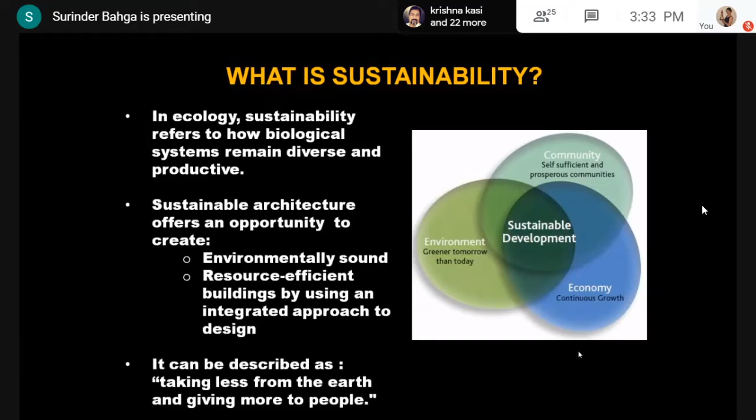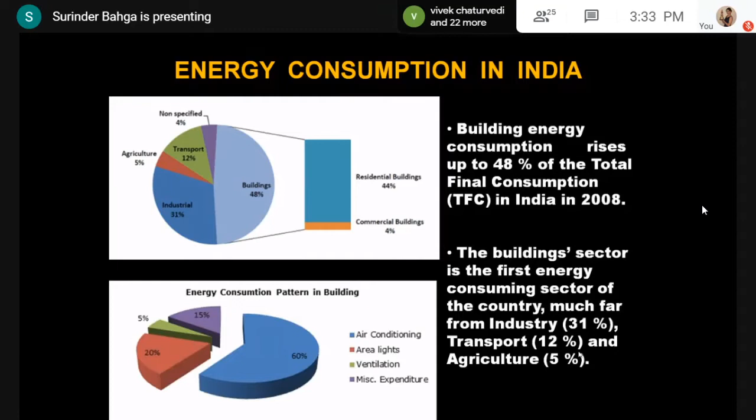So to have a quick look, giving you some historical examples. This is the picture of remains of Mohenjo-daro, which existed in 2600 BC. You can see in this picture our forefathers have given a lot of respect to the local topography, to the wind direction, to the local climate, and to the local materials.

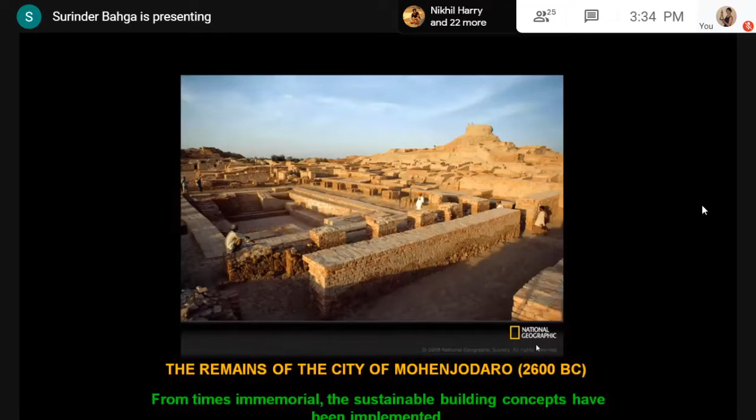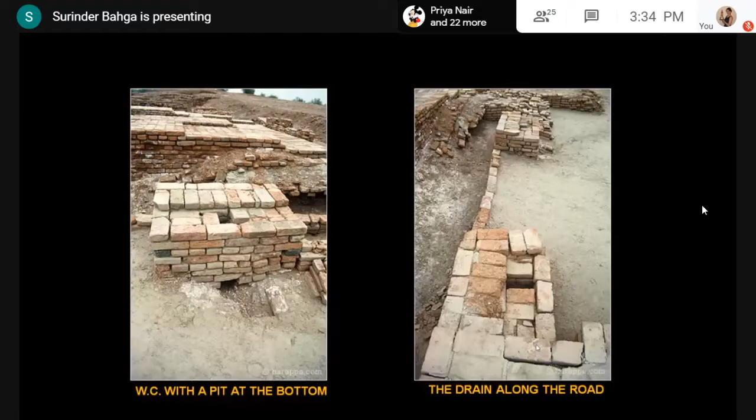There was a proper drainage system. The houses were planned - very modern houses were planned, which have no decoration.

And likewise, in Rajasthan, in the Rajput period, in 1200 AD, you find these Havelis. You look at the intricate detailing of the facade, how the windows are shielded from the dusty winds, and we have courtyard planning, self-shading pathways, all in these Havelis.

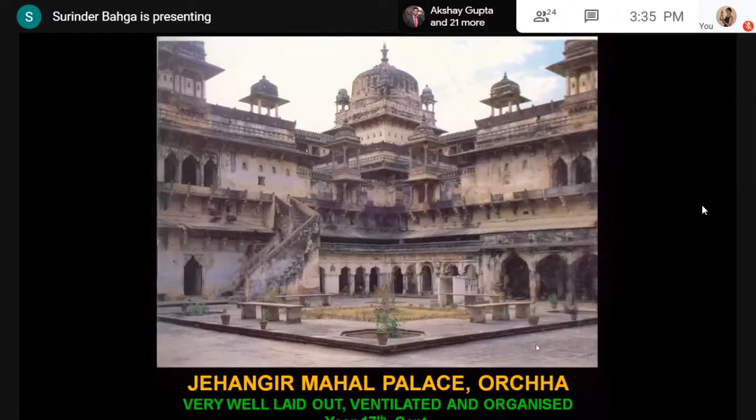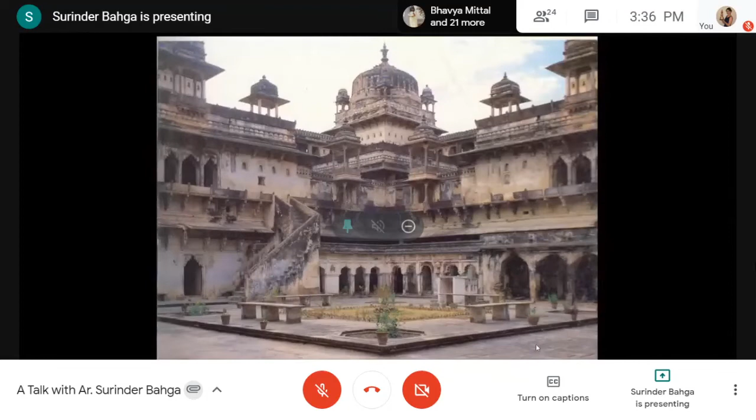This was all done by our ancestors to make the buildings comfortable, but not damaging the environment and Mother Earth. During the British Raj, when Lutyens and Herbert Baker came to Delhi, they studied Delhi's climate, and accordingly they started designing the Secretariat of Delhi, the Parliament House, and many churches and Saint Stephen's School in New Delhi. They took full care of the environment.

In the 50s, when Corbusier was called by Pandit Nehru, the first thing on reaching Chandigarh was he asked his team to study the climate of Chandigarh, and accordingly the city was to be planned.

On our left side is a picture of the Open Hand Monument, which is about 80 feet tall, and it gives the wind direction. This is the emblem of Chandigarh also. This was installed, planned to create awareness in residents about the wind direction, and this was in a way a message for the architects and residents of Chandigarh that we need to respect the climate.

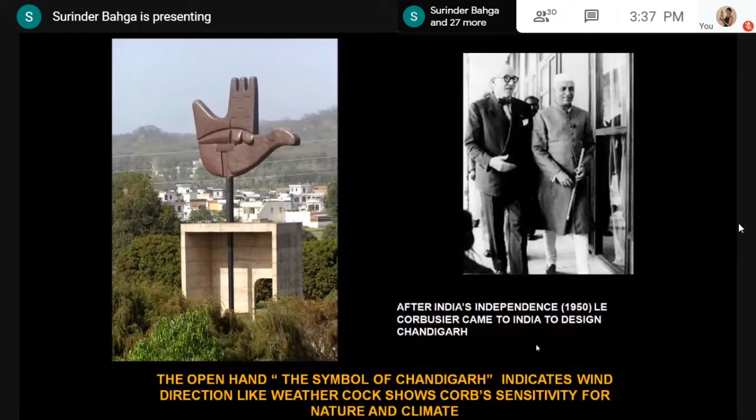Chandigarh is the only city where 35% of the areas are green, and we are proud to say that we have 1700 parks in the city.

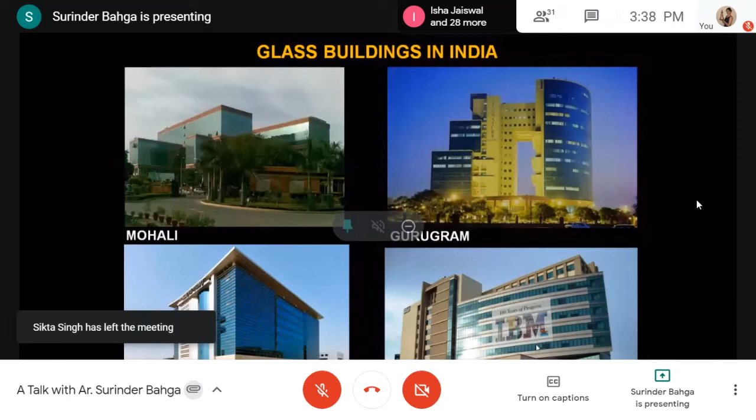After having so much of a beautiful historic past, what we architects are doing now - you look at these buildings, one in Punjab, one in Haryana, another in Mumbai, another in Bangalore. All the buildings look alike. They are glass clad, aluminum clad. They have nothing to do with the climate. And we are closing the windows, everything, and putting large size air conditioners.

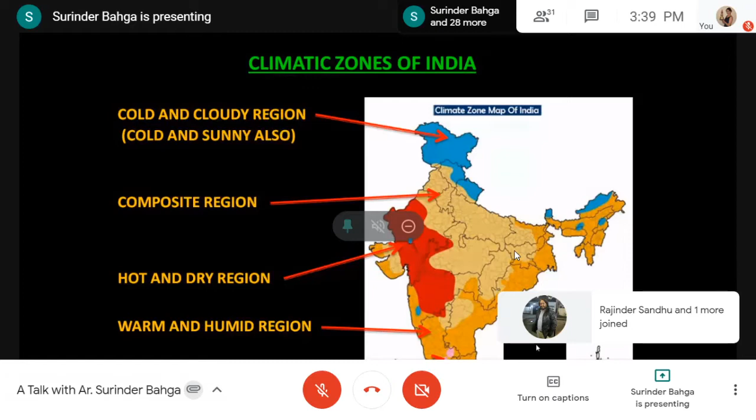When we design buildings, each zone has its own parameters for designing the buildings. So in brief, we will be talking about these.

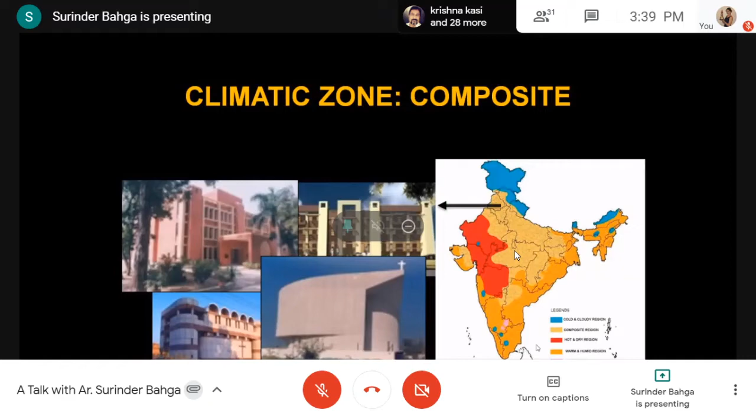When we design buildings in a composite region, which is Punjab, Haryana, Central India, these are the design strategies which we are supposed to follow. Resist heat gain in summer and resist heat loss in winter - this is one strategy. Second is promote heat loss in summers and in monsoons.

How we can do it? You can read on the screen, I have given some pointers. We can put cavity walls, thicker walls, roof insulation, wall insulation, orienting the building in the right way. And for promoting heat loss, we can have courtyards, wind towers, tree plantations and water ponds, etc.

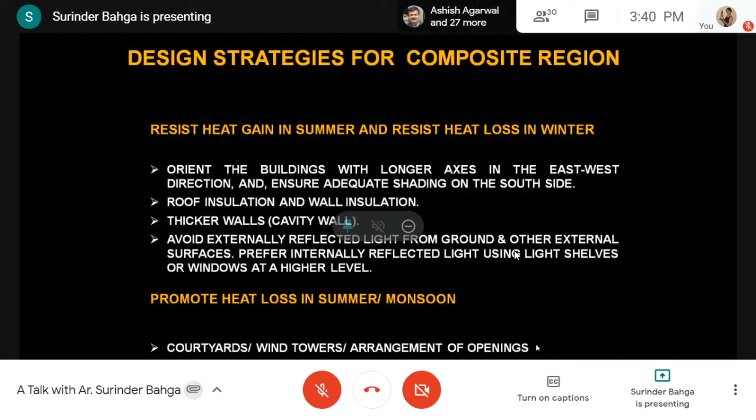This is a church building we designed in Chandigarh, and the Government of India, in one of the surveys conducted by TERI, has selected it as one of the best 41 buildings in India. What we have done is, you can see this photograph, we have provided very small and deeply recessed openings, and we have given a light color treatment outside. Even the vaulted roof on top is painted white so that incident sun rays are reflected.

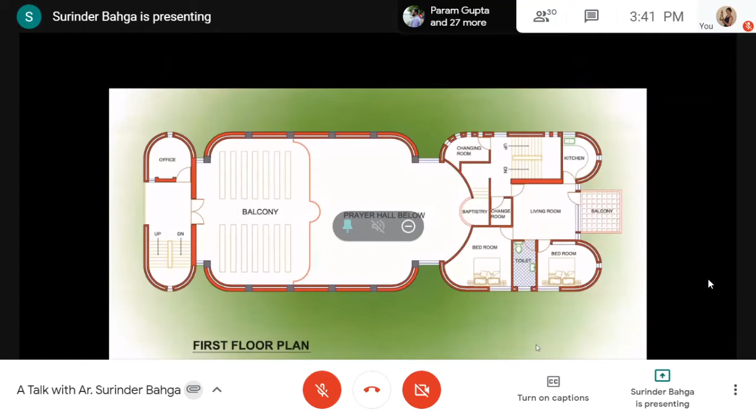Around the building we have provided a cavity wall - you see in this plan there is a cavity wall all around. The interior of the building is on an average 5 degrees cooler than any conventional building in the near vicinity. This is the merit, and we do not need to light the interiors during the day. Each corner gets the right light at the right place.

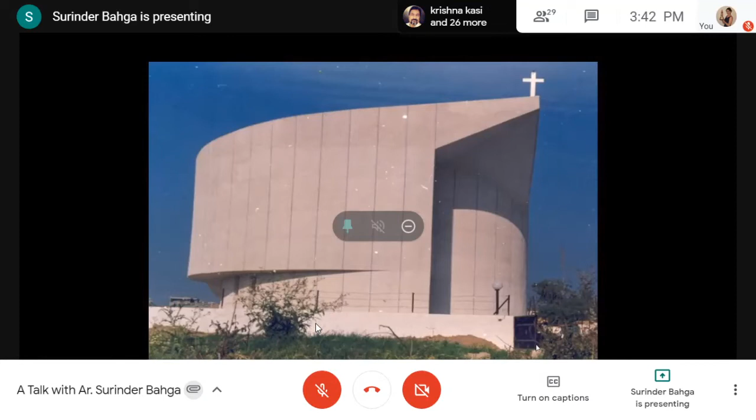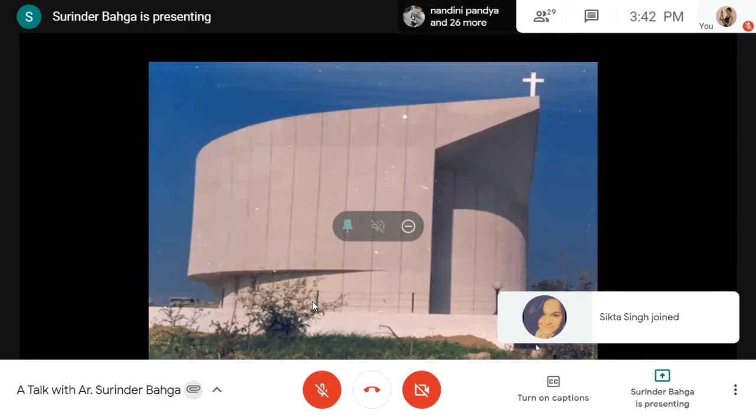Another church we did in Chandigarh, and this church was one of India's entries in the 5th Asian Congress of Architects, held at Lahore 2 years back. This is the western side, which is the most dangerous side, because the sun gets very hot in the evenings. The western side was the front side, so we designed it in such a way that it looks aesthetically pleasing, but at the same time there are no windows here. On the other hand, there is ample light inside because the windows are placed in such a way that they are not facing the western wall.

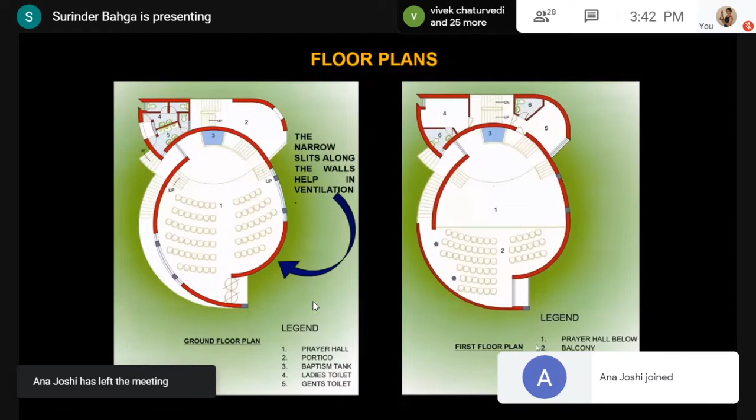This is the plan of this sculpturous church.

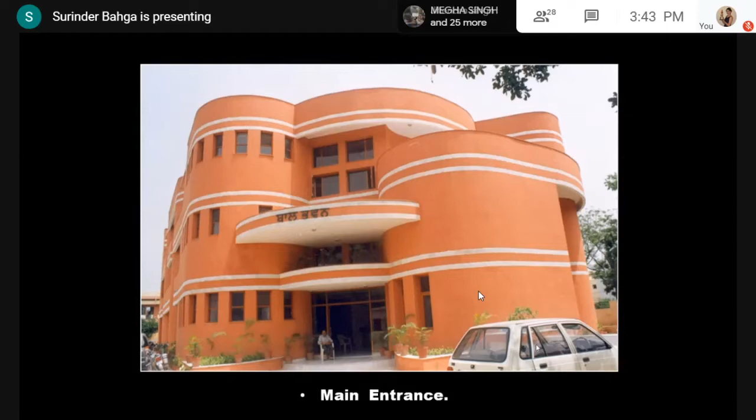Then we got a chance to design a Bal Bhavan in Mohali, Punjab. In this building, this is the western facade again - on the left side you can see we provided all the toilet blocks. We combined all the toilet blocks and placed them on the front side, the western side, because during the day the front side gets heated up and all the heat is absorbed in the toilet block. Hence, the heat is not transmitted inside the dormitories and inside other halls.

These are the pictures of the Bal Bhavan. You can see all windows are properly protected.

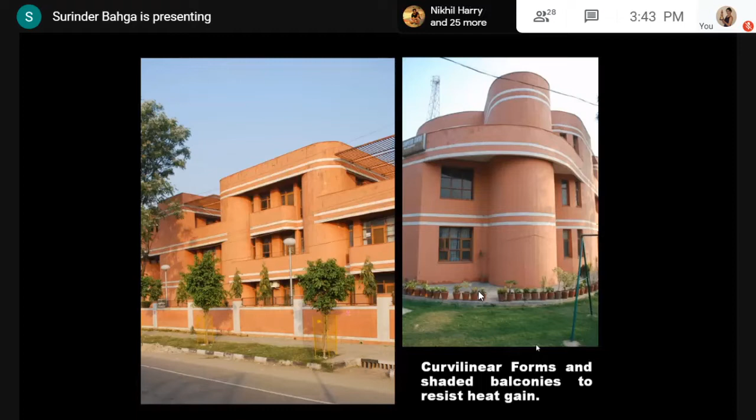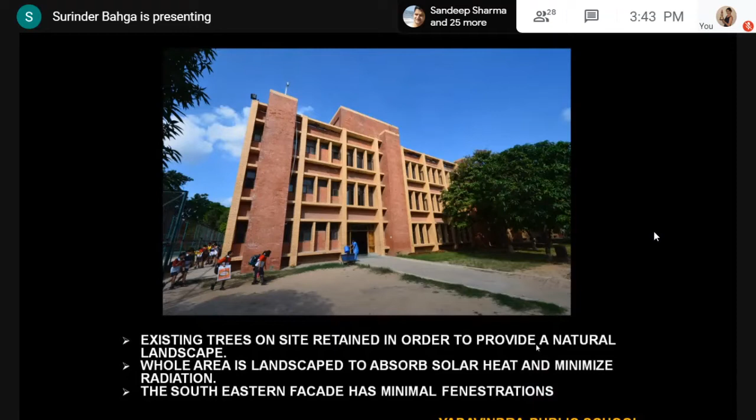It's a very historic school which is designed by a very famous architect, J.K. Chowdhury, who designed IIT New Delhi. This is the original campus designed by him. So we designed this particular building in that campus, matching his architecture - that was one criteria. At the same time, you can see all the windows are properly protected with a combination of horizontal and vertical louvers.

It was a competition, and we won it because the Raj Mata, mother of Captain Amrinder Singh, was the chairperson of the jury. They laid down a condition that the architect selected would not cut even a single tree, and it was a very densely planted site. So we put a very compact block in a limited space, and not a single tree was cut. That's the reason we got this project.

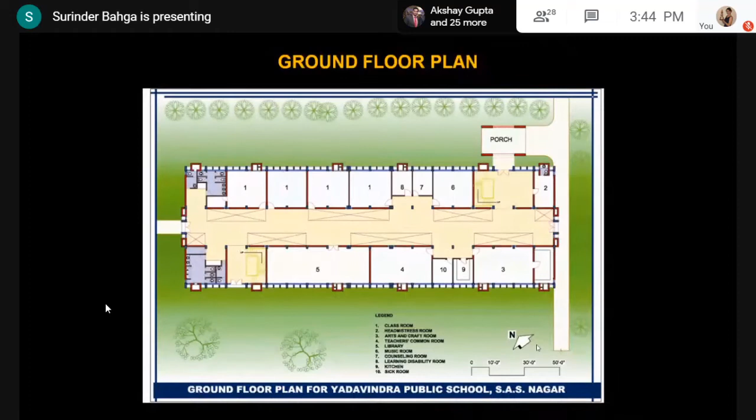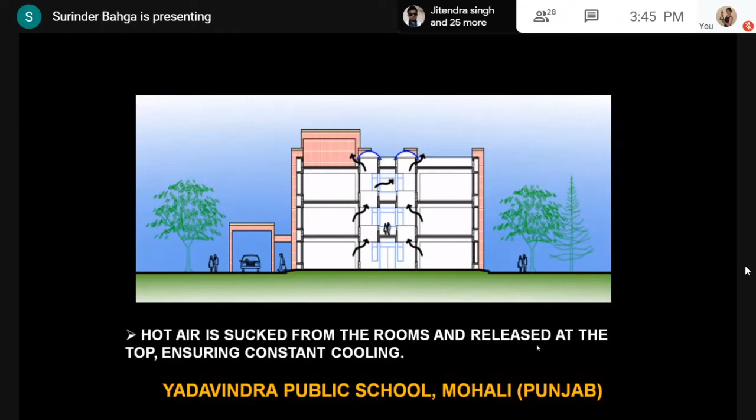In other parts of this school, this is how we have shielded the windows. And this is another school we did for a Christian community, a Baptist school in Chandigarh.

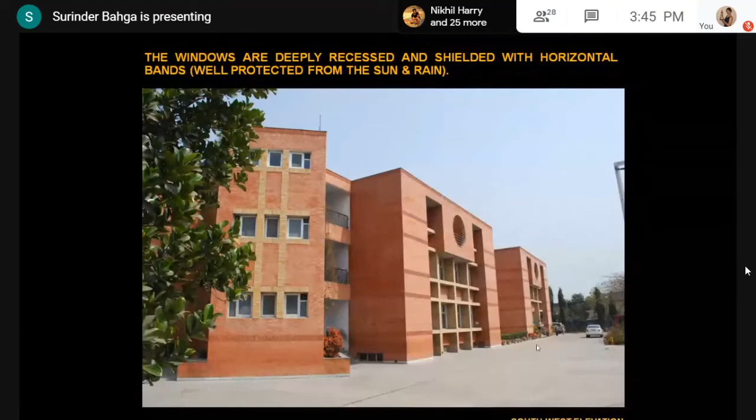In this school, you can notice we have protected all the windows properly, and in addition we opted for courtyard planning, which many modernists consider out-fashioned, but we insisted to the client that we go for it. The smaller courtyards are covered with a polycarbonate sheet, and a singly loaded corridor feeds all the classrooms.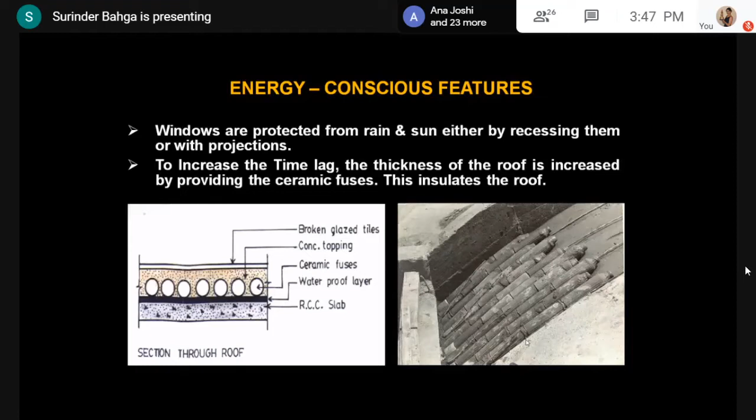In the layout, we have also given courtyard planning, and the top roof is proposed to be very thick, like Doshi has done in his Sangath. The picture on the right is of Sangath, showing how he gave a thick mass in the top roof so that heat does not enter the interiors.

We designed this project and got the first prize. This was supposed to be an energy-efficient building. We designed the top roof of this convention center—you can see it tapering towards the southwest, and the entire roof is made of solar photovoltaic panels.

Apart from this, we have introduced rainwater harvesting in a proper way. Not even a single tree was allowed to be cut. Green materials were introduced, along with many other features. This is the plan form.

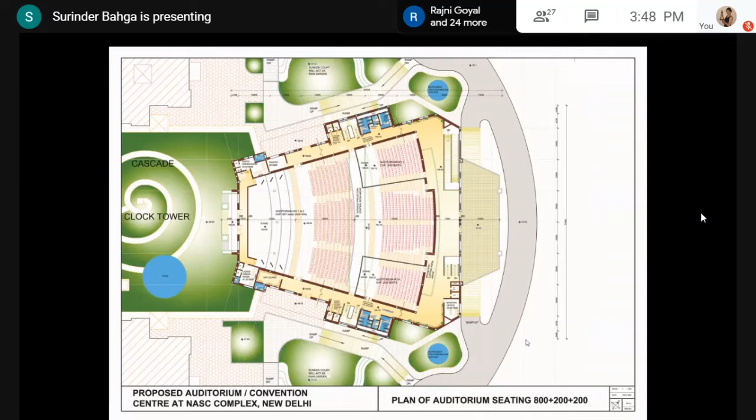After this, the National Institute of Technology in Kurukshetra asked us to design about 1,200 postgraduate student hostels—a huge project. Here we introduced courtyard planning, and each postgraduate student gets an independent small balcony where they can sit outside, and this balcony also protects the window and door.

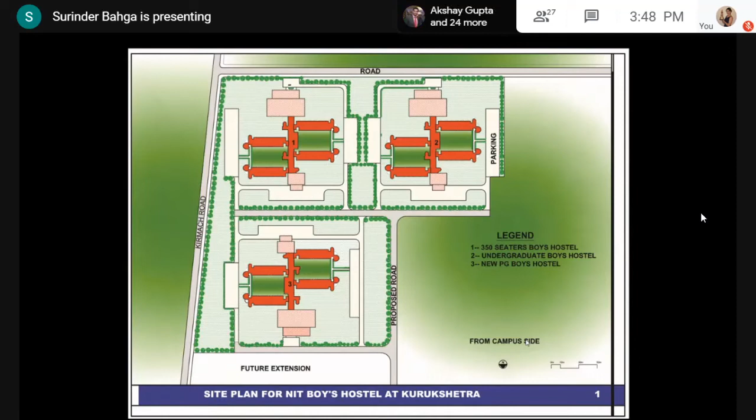The toilet blocks are put at one end. You can see the layout—we opted for the right orientation, gave courtyard planning, thick walls, and introduced many other common features that nonetheless save energy.

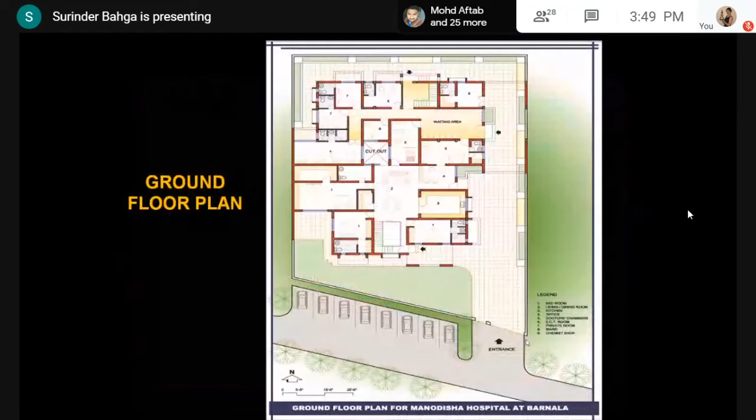This is a green library we built in a very remote village in Punjab. It's a very good, very small project.

In this project, you can notice we put very small openings, and below the opening, the height is such that we can place book racks alongside the external walls, because book racks can serve as insulation material. Naturally, the heat intake in the interiors is comparatively reduced.

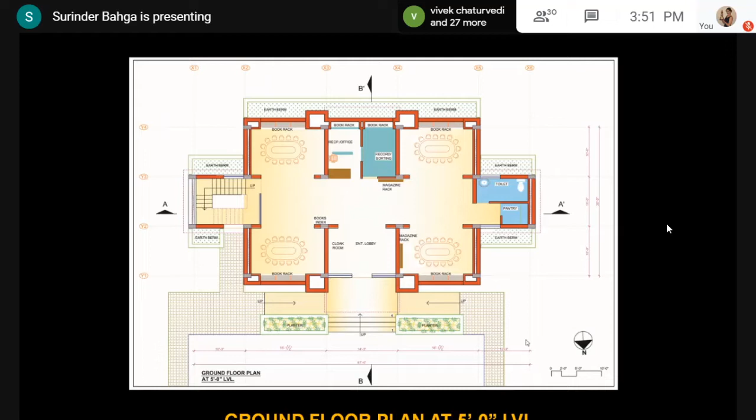That finishes the composite climate zone, and now we are going to talk about the hot and dry region—mainly Rajasthan and parts of Gujarat.

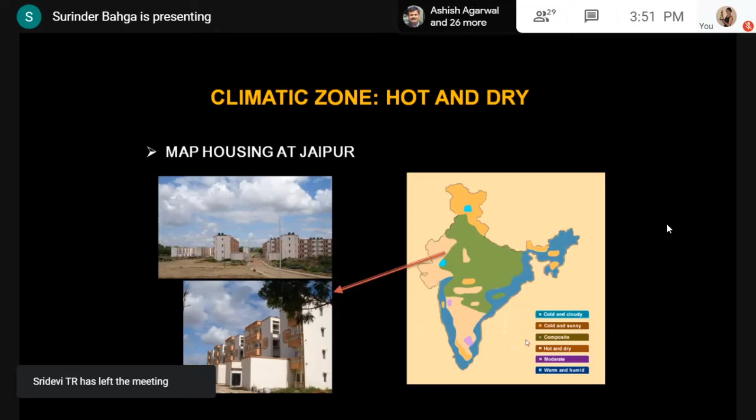When we design buildings in this region in particular, we have to resist heat gain and we have to promote heat loss. This is the design mantra.

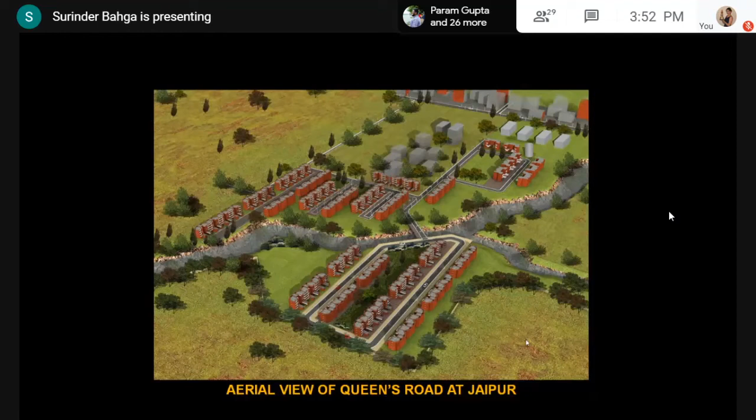We got a chance to design a huge housing project for the Indian Army, where we built 800 houses in a township. There is a requirement that we should face all the housing blocks on north and south, and the east and west sides should be blank. I had to give 16 presentations to the army authorities to convince them to follow this layout, because they were insisting just the opposite, since the road was in a different direction. The army general was insisting he wanted housing facing the front road, the main road. I said, sir, that will be totally wrong. After the 16th presentation, he said, okay, go ahead.

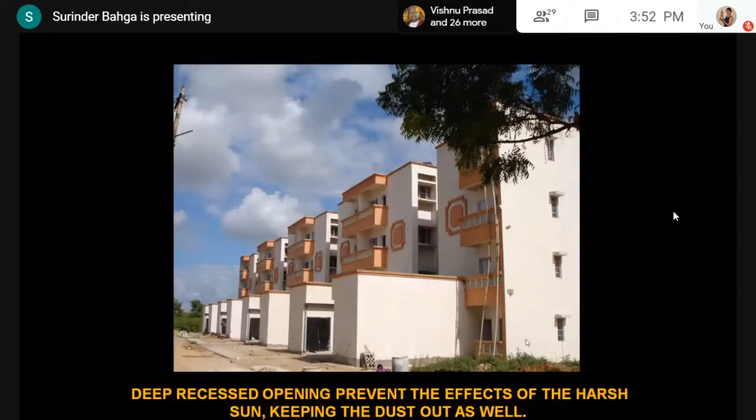In this housing, you can see we used very simple construction, but we opted for light colors, deep balconies and a self-shading facade. We also opted to retain whatever single or double tree existed at the site. The layout of the township was done in such a manner that not even a single tree was allowed to be cut.

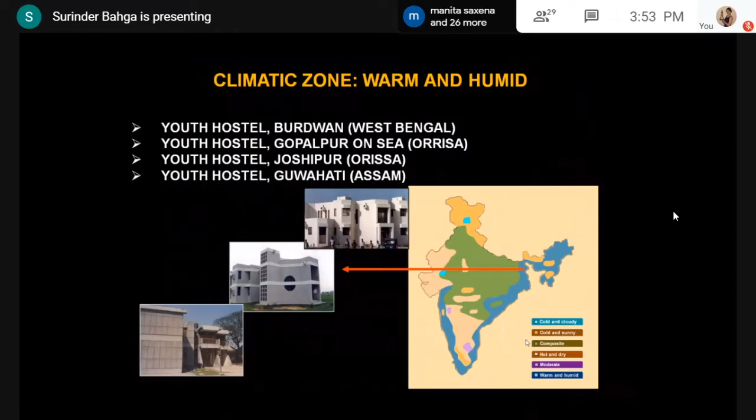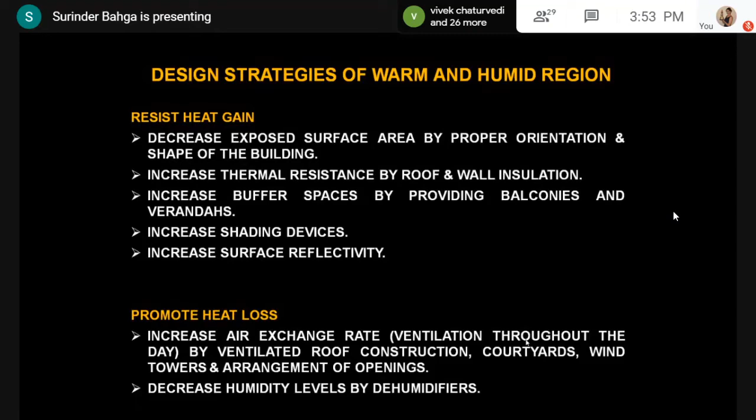The next category is a warm and humid zone. In this zone we got a chance to design some youth hostels in West Bengal, Odisha and Assam. We all know that when we design buildings in a warm and humid region, we have to resist heat gain, promote heat loss, and promote a lot of ventilation.

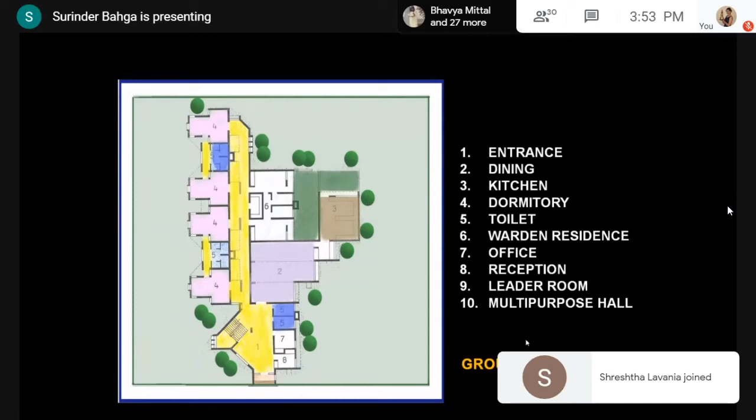In the Burdwan Youth Hostel, which we designed in West Bengal, a very small building, you can see the plan of the hostel, where number 4 is written is a dormitory, and this dormitory has almost 6 openings.

It is a very remote area. You don't get even proper electricity in that region. So what we did is open all 6 openings in the dormitory and put the beds inside, and at least it becomes livable. It's a youth hostel for young children who travel.

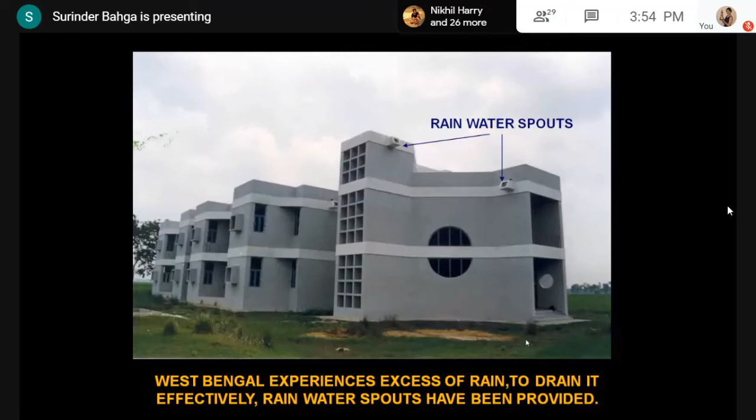This is a picture of that. You can see, because we get a lot of rainfall, the pipes get choked, so we provided rainwater spouts. We provided concrete jali in the staircase block. You can see we protected the windows from all sides with these projection boxes.

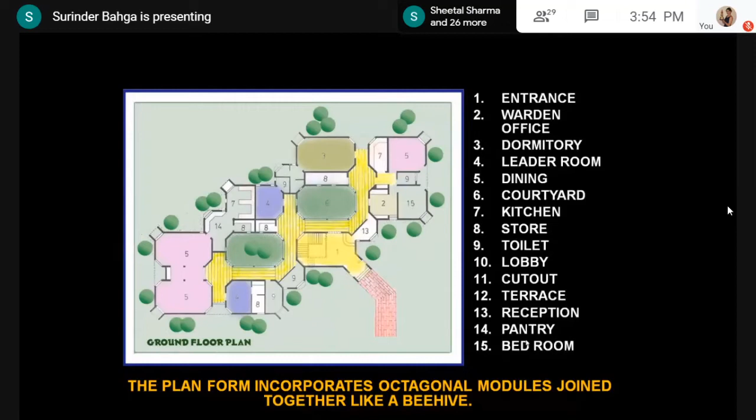Then we designed another hostel in Joshipur, which is in Odisha. You can see this is a sort of web, in which an octagonal module is repeatedly used, and that octagonal module becomes a courtyard also. All the facilities are interwoven around those octagonal courtyards.

Same formula: we used rainwater spouts because we get a lot of rainfall there. White color is used to reflect the sunlight. Small openings are introduced, and courtyard planning is done.

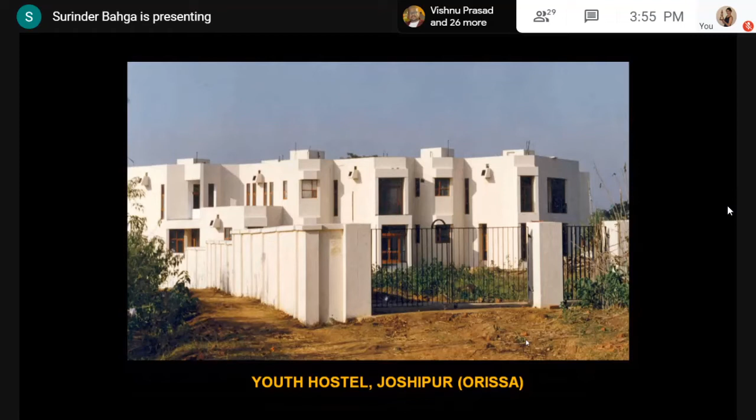In a moderate region, the difference is that the climate is not very harsh. It's a very small pocket near Pondicherry, shown in purple on India's map. The climate is comparatively less harsh, so architects can play a little more in these areas.

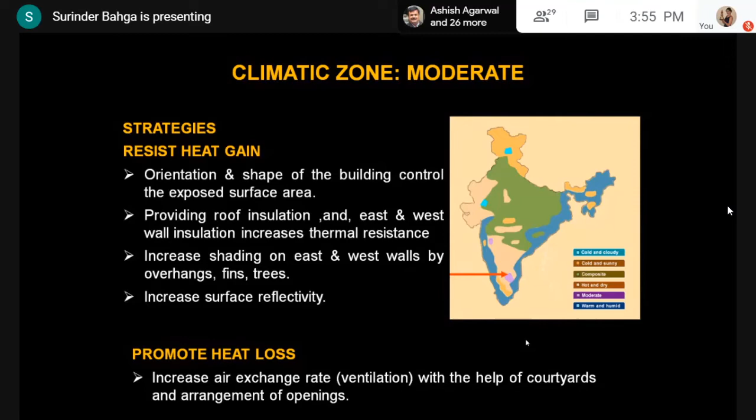Unfortunately we couldn't get a chance to design any project in this belt, but I have borrowed one project from a close friend, architect Rumi Shroff from Bombay. He designed this corporate office complex at Pune, which falls in a moderate climate, as I said earlier.

In this project he used vertical slit openings, a very neat, clean facade with staggered slit openings. Earth berms are introduced, and in the interior he has taken a lot of light from the skylights provided over the atriums. It's a very beautiful building. It was published, I think, 30 years back, and it is still one of the best buildings to my mind.

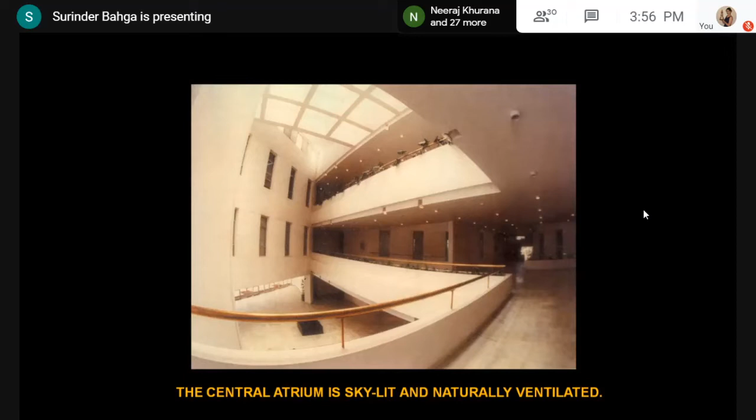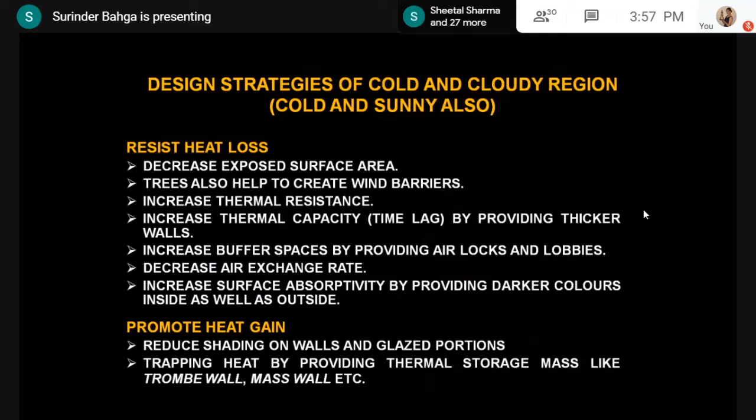The next category of climate is cold and cloudy region. I will show you one example, a bank in Shimla. These are design strategies for a cold and cloudy region. Here, the design strategies are just the opposite: we have to resist heat loss and promote heat gain, which is the opposite of the composite climate design mantras.

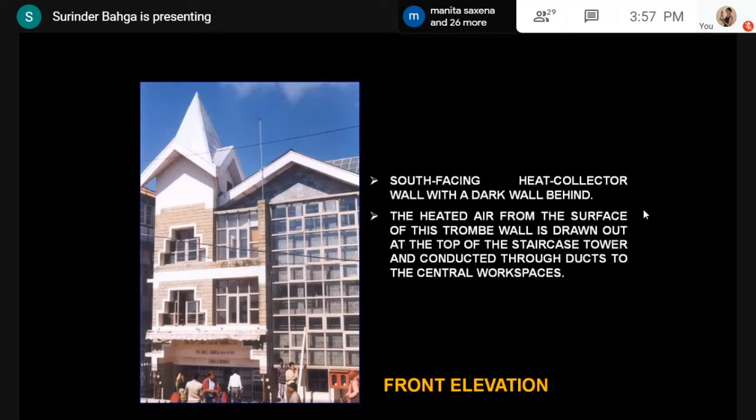The heated air is taken into the interiors and circulated in the building, which gets naturally heated. Hence the load on heating is reduced.

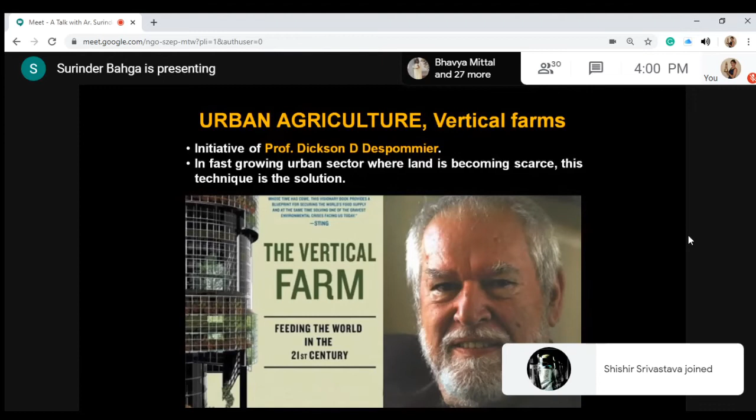Professor Dickson came up with the concept that we can have agriculture on our buildings. He technically named it the vertical farm, and claims that you can have agriculture in the building itself, and the residents of that particular building can use those fruits and vegetables in the cafeteria, and the building becomes self-sufficient.

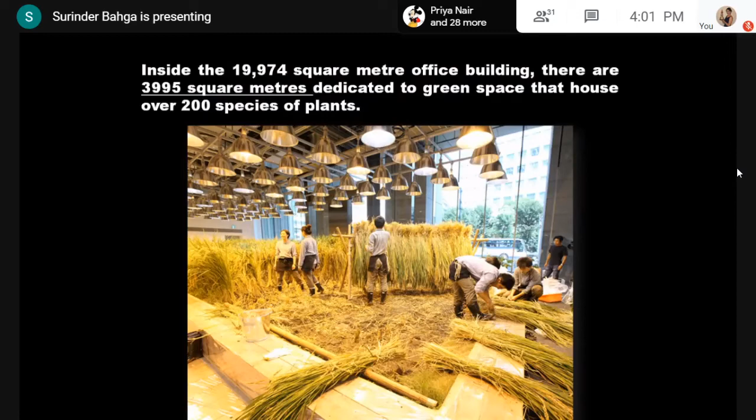These are some other pictures of this particular project. Out of nearly 20,000 square meters of this project, nearly 4,000 square meters are reserved for agriculture in this building. It's a new trial, and I think it's a beautiful concept.

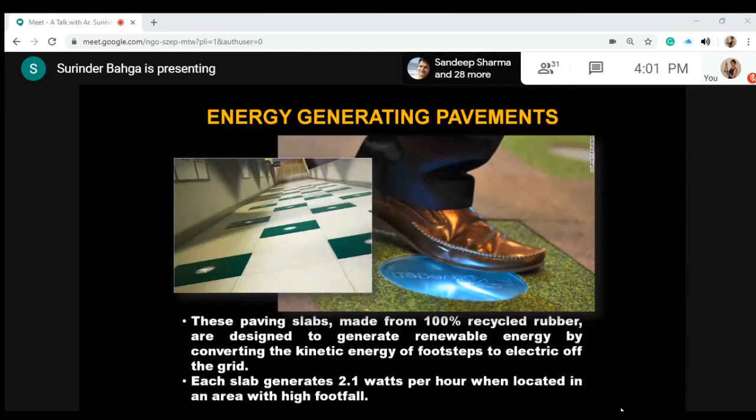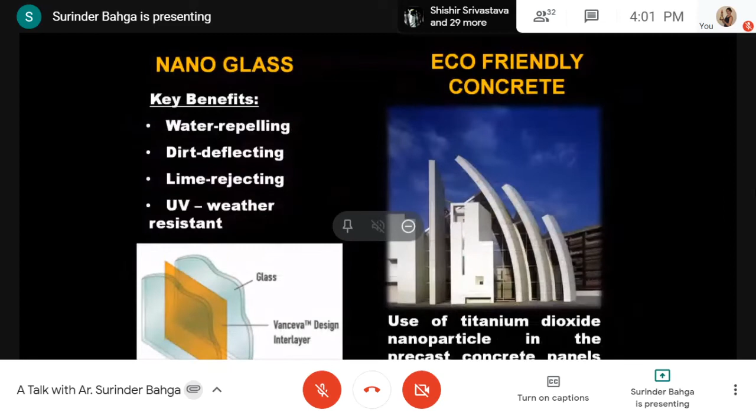And then we have energy generating pavements. By recycling the rubber, we can get pavement tiles which can generate electricity. Then we have a concrete which never gets blackened - this is used in the Jubilee Church.

Then in glass, nanotechnology is available now. No dirt is put on the glass; it gets automatically cleaned.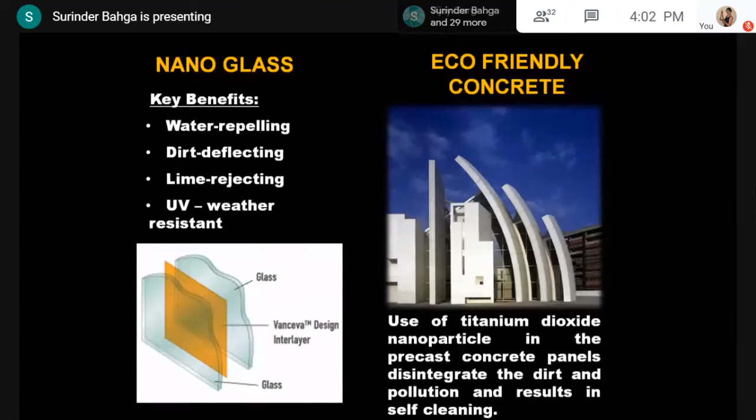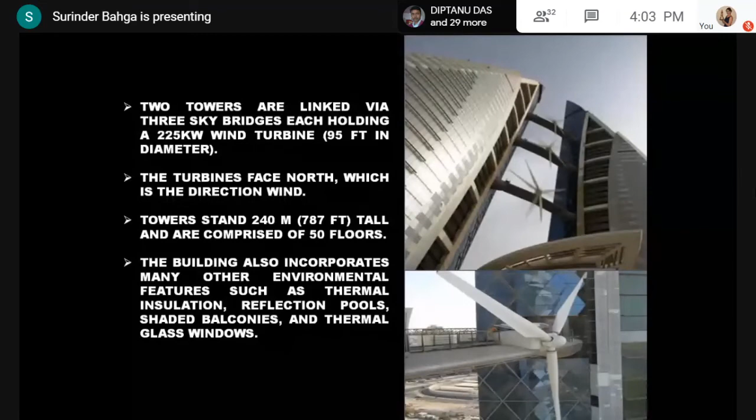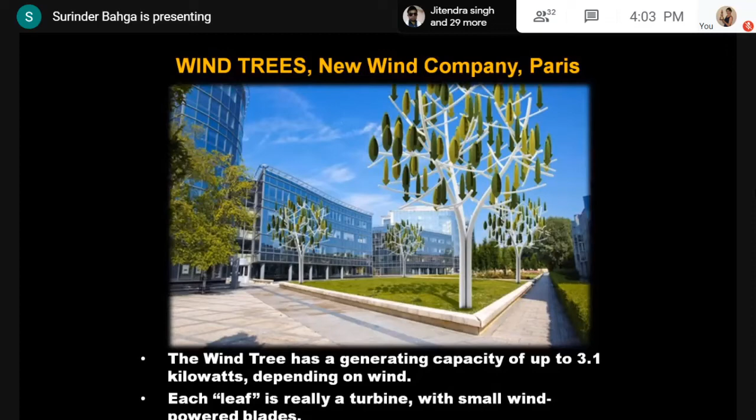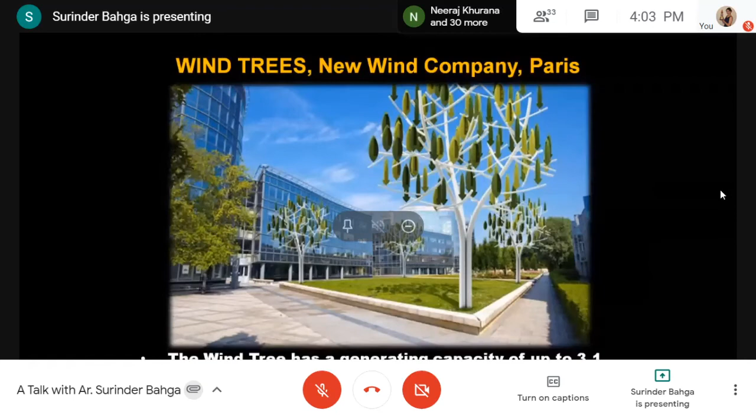Then we have a new concept of wind trees. Where we cannot use wind turbines, because they normally require high wind speed, but when we get a very low speed of wind, we can have these wind trees. A wind tree is an artificial tree which can generate electricity for the users of that particular area, and it can produce energy from wind moving at just 7 kilometers per hour.

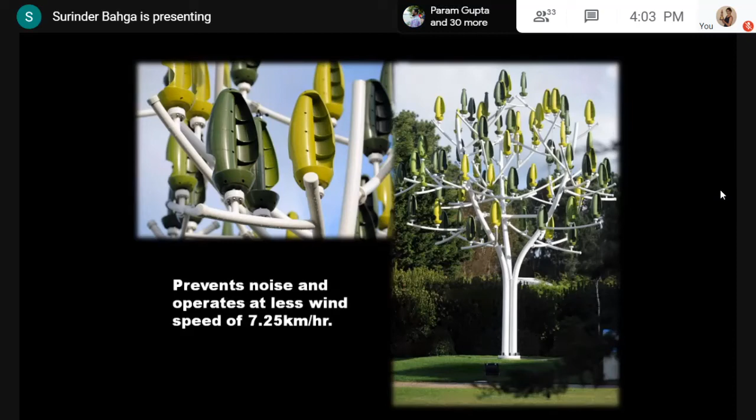You see the detailing of the leaves, the artificial leaves. They receive the wind and convert that wind pressure into electricity.

Another new concept is solar towers. Some engineers and architects are working on this concept, because when we build multi-story buildings, the area on the top roof is very limited for solar photovoltaic panels, as the area gets consumed with water tanks, lift rooms, and many other services.

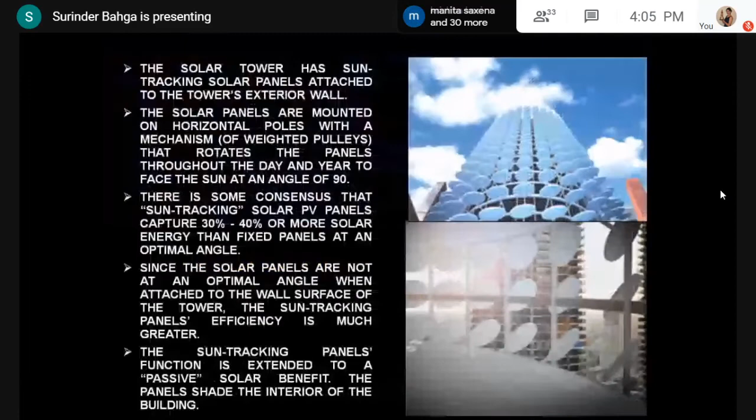So these are sensor operated solar disks. All the technical details are available, as you can see.

Earlier there was a concept that we have to put straight solar panels. Now solar panels can be fitted in any form, on angular roof or circular roof. Panels are available in all shapes and sizes.

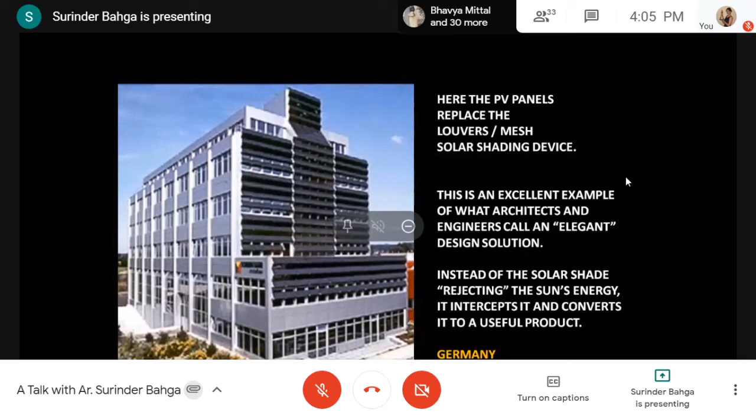This is an example from Germany. In this particular building, you can see the facade, the louvers of this building, which are seen in black color, are made of solar panels. The louvers, the window shades, are producing electricity.

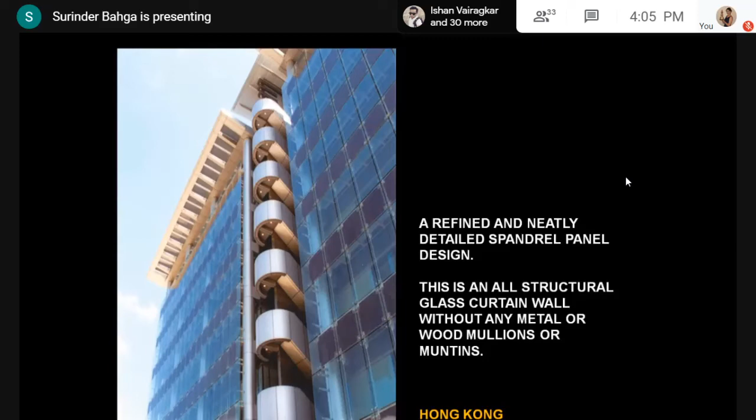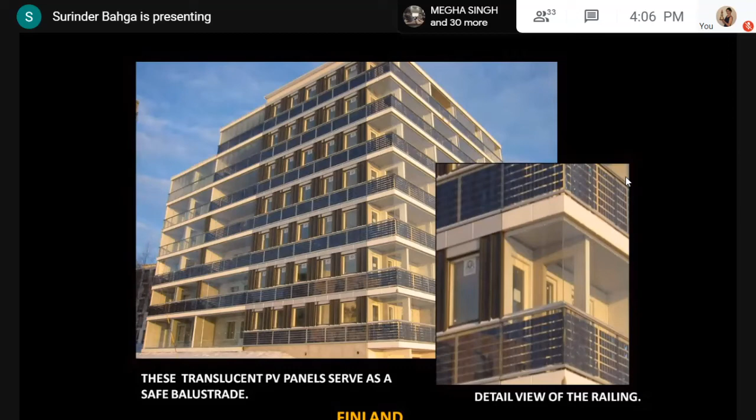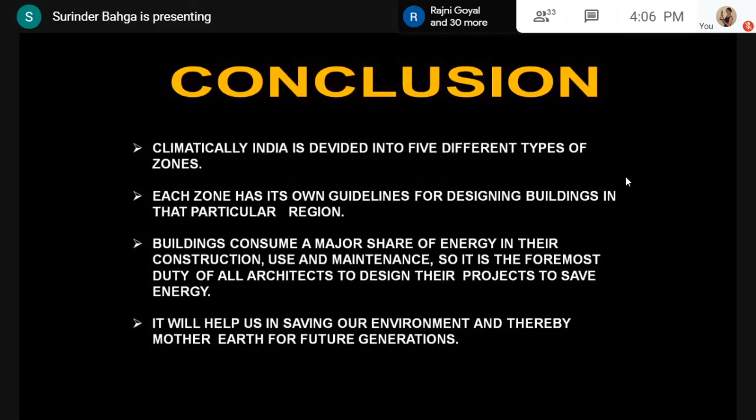In the end, I would like to conclude that India is a very huge country, and we need to design buildings according to the requirement of a particular climate zone. Each zone has its own guidelines, each zone has its own design mantras, and we should strictly follow that. All our religions advocate saving the environment, saving Mother Earth, and we architects have a double responsibility to save Mother Earth for future generations. With this note, I close. Thank you so much.

Hello. Yes sir, yes sir, ji. Yes sir, Abhitesh. So it was really nice session, thank you. Now some students are asking some questions, so I'll go with one. One is asking how we should choose materials according to our climate.

There are many green materials available in the market, and a lot of research is happening in this field. In the near future you will be getting many more materials across the world and in India too. But in a nutshell, we should use green materials. We have bamboo available in different forms, like sheets of bamboo, frames of bamboo, roofing of bamboo, and we have green bricks, fly ash bricks, and so many other things already available in the market.